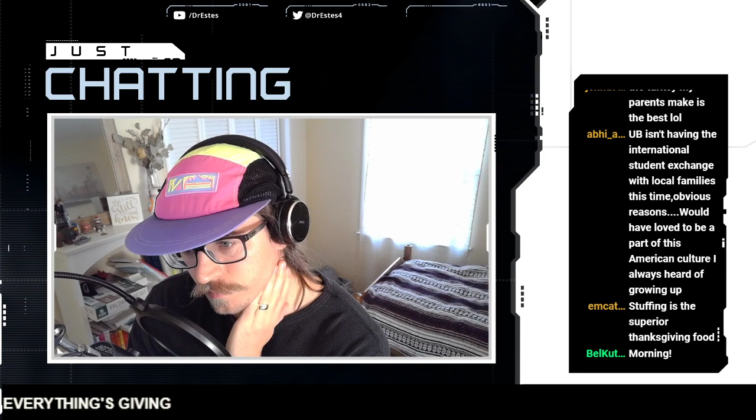Good morning, Belka. Abhinav says UB isn't having international student exchange with local families this time, for obvious reasons. Yeah, that's a huge bummer. Would have loved to be a part of this American culture I always heard of growing up. I heard you, Abhinav, I was actually thinking of that last week, because they do that every Thanksgiving. That's a huge bummer. emcat, I agree with you, stuffing is the superior Thanksgiving food.

How did the project go? So far my team is working on part 5. Bit stuck on it. Okay.

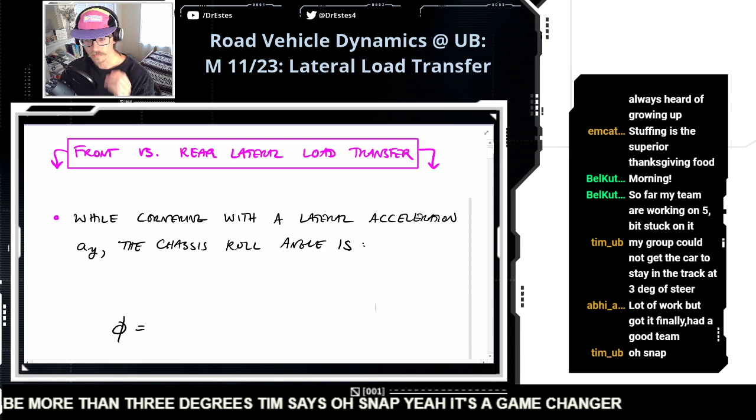Part 5 has been giving us some trouble, says Stonebuster. Okay, gotcha. How about we get through this content today, and then if you guys have questions on the project I'll hang around for a couple minutes and we can talk about it. It'll be fun once you get it to work.

Okay, so we're going to talk about modifying the lateral load transfer during cornering at your front versus your rear tires. So why do we care about that? Depending on the load transfer at the front or the rear, that can make your car more understeer or more oversteer.

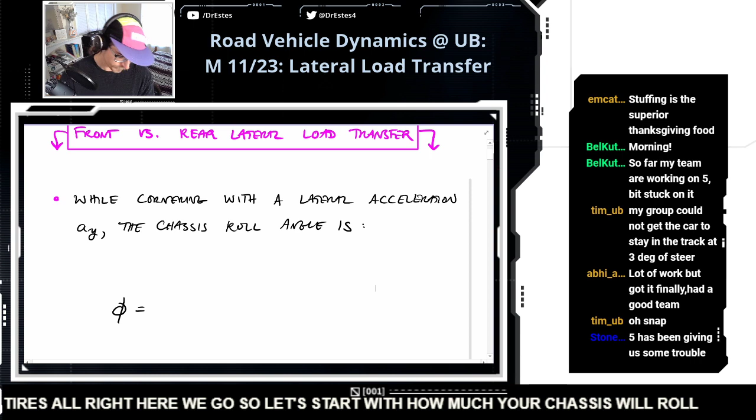Let's start with how much your chassis will roll during cornering. I'm going to put a negative sign out in front of this - I missed this before, I think I forgot the negative sign. So the roll angle is your mass times your lateral acceleration times the height of your CG above the roll center, divided by the sum of your front and rear roll rates.

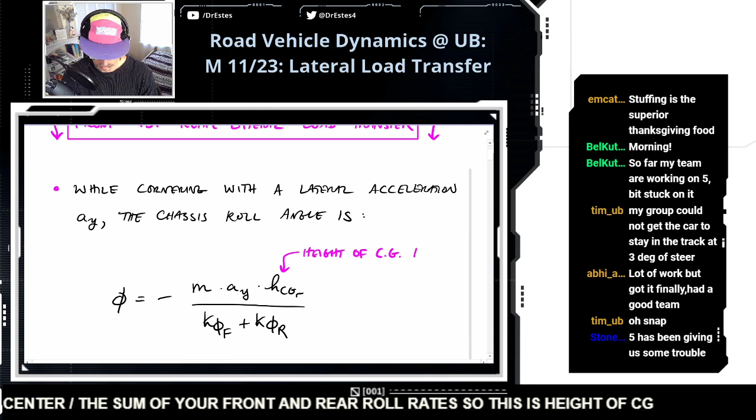So this is height of CG above the roll axis. The roll axis is the straight line that connects the front and rear roll centers. Your CG is somewhere towards the middle of the car, and it'll be some height above that line. And then we have the front roll rate.

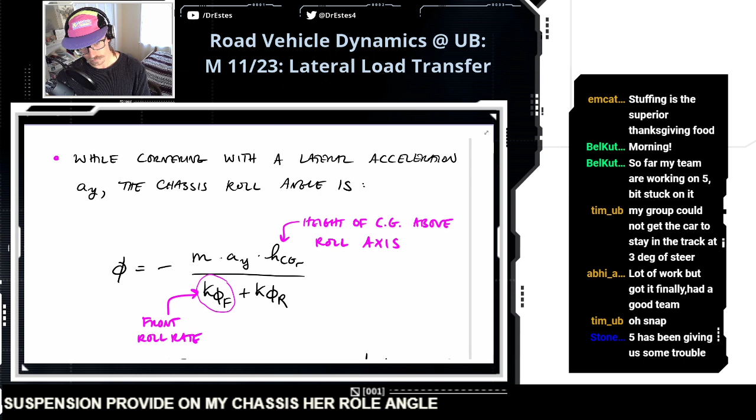The front roll rate is just like a torsion spring - this is saying how much torque does my suspension provide on my chassis per roll angle. It's kind of like Hooke's law: if you roll a little bit, the suspension is going to push back on you with a torque. So the roll rate describes how much torque per roll. And this is your rear roll rate.

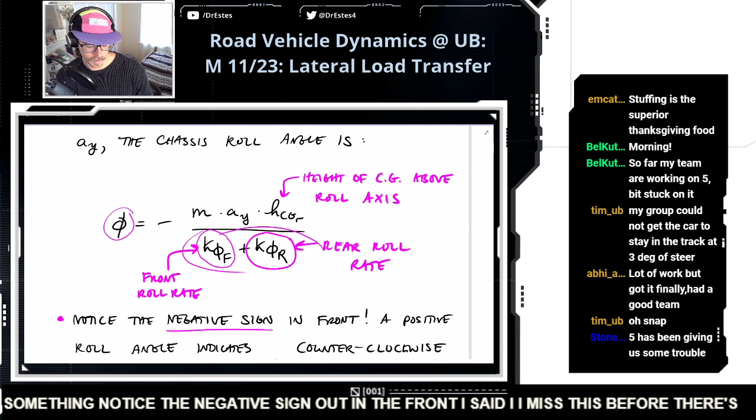So obviously, the bigger these roll rates are, the stiffer your suspension springs, the smaller your roll angle is going to be. Okay, so I want to point out something - notice the negative sign out in the front. I said I missed this before. There's a negative sign because a positive roll angle should indicate counterclockwise rotation about the BX axis.

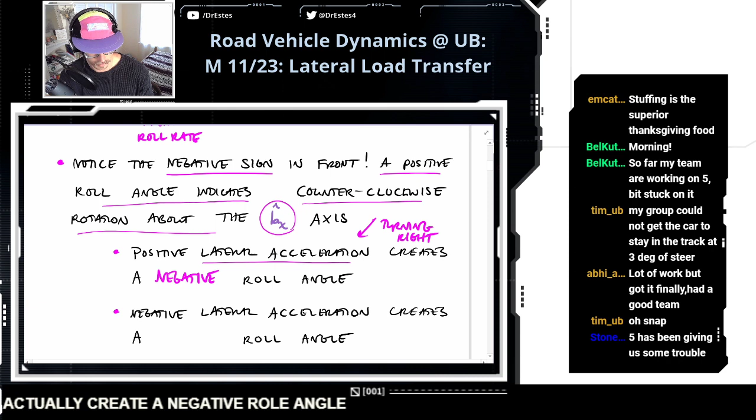That's the axis coming out of the nose of your car, pointing out of your windshield. So by the right-hand rule, a positive roll should be a counterclockwise rotation about that axis. I'll show this with some pictures below, but positive lateral acceleration, which means turning right, that should actually create a negative roll angle. And the opposite of that is if you have negative lateral acceleration and you're turning left, that should create a positive roll angle.

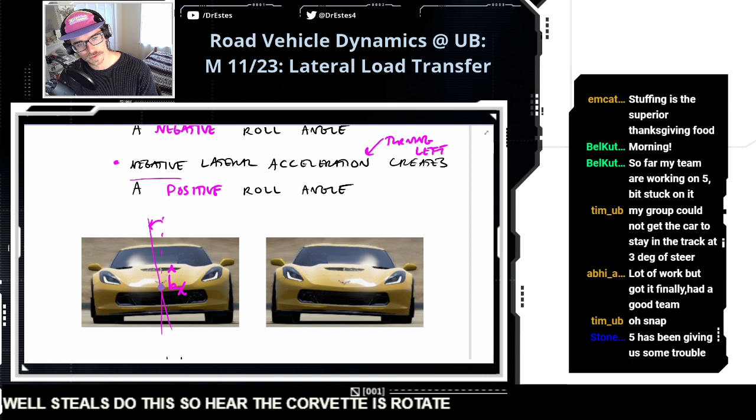So here the Corvette is rotating counterclockwise about that axis, right? So this is a positive roll angle.

Okay, but question for you in the chat. Which direction is this Corvette cornering? Is it to the driver's right or to the driver's left? Is he making a right or a left-hand turn from the perspective of the driver? And the driver is sitting right here.

Okay, good. Right, because the weight's gonna roll towards your outside tires. So we're definitely turning this way to the driver's left, but that means the lateral acceleration is less than 0. So if you're turning left, you have negative lateral acceleration. Whoa, what happened there?

Okay, that's better. That's better.

Okay, so we have counterclockwise rotation about BX. That's positive roll. And then just to be complete here, now we're turning right. That's a negative roll angle because it's clockwise about this body axis. And okay, so now we're turning, our lateral acceleration is to the right, which is greater than 0.

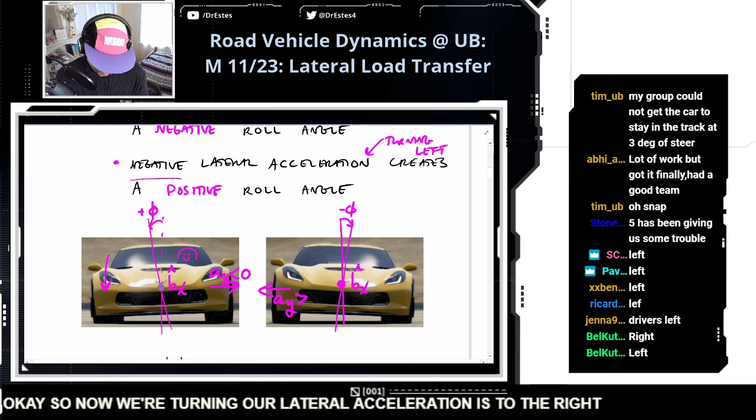Okay. Looked at wrong orientation for a second. It's okay, I forgive you. I mean, I almost didn't forgive you, but now I forgave you.

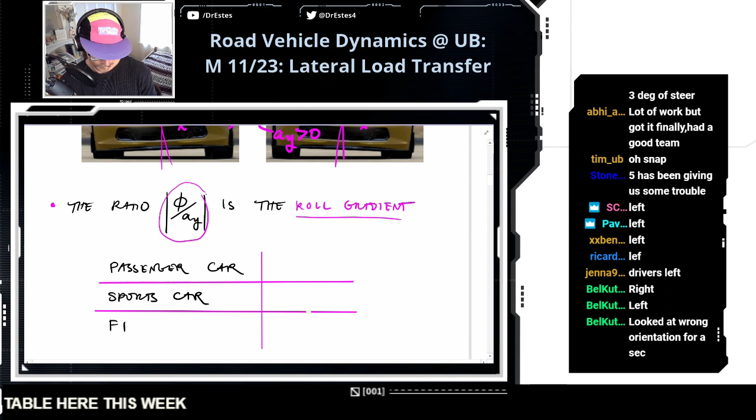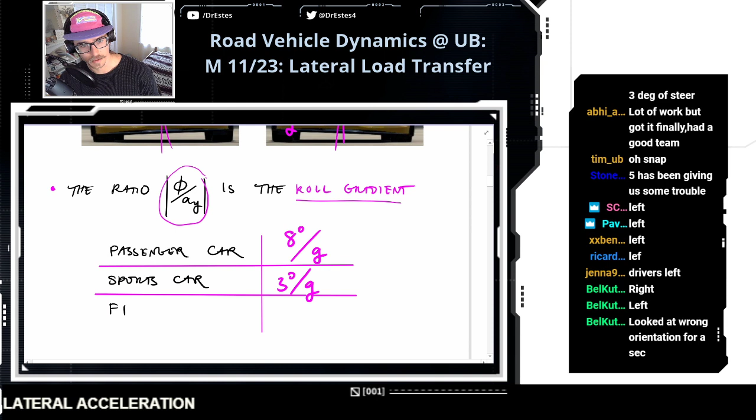Okay, so the amount of roll you get per lateral acceleration in a car is called the roll gradient. And so let's look at this table here, because this will give you an idea. I think we mentioned this last time, but if you're in a passenger car, you're going to get about 8 degrees of body roll per G of lateral acceleration. So you get a decent amount of roll, and that's because the suspension in a passenger car is a little bit softer. That improves the ride of the car. When you go over bumps, you feel it a little bit less, but a softer suspension also allows your car to roll a little bit more. So if we're talking about a sports car, probably like a Corvette or something, maybe 3 degrees of body roll per G of lateral acceleration. And then by the time we get to Formula One, it's going to be like 1 degree.

Is there a symbol for the roll gradient that we use? That's a great question, Benny. I bet there is a symbol, but I don't know what it is. So I've just been using that ratio. If somebody finds some symbol, I would appreciate it. But I haven't found it.

Now, the reason that an F1 car has such little roll has to do with load transfer, but it also has to do with the aerodynamics of the F1 car. They're very particular about how the car is aligned with the pavement, and there's very little space there. So if you get some body roll, you're gonna bottom out. Excuse me.

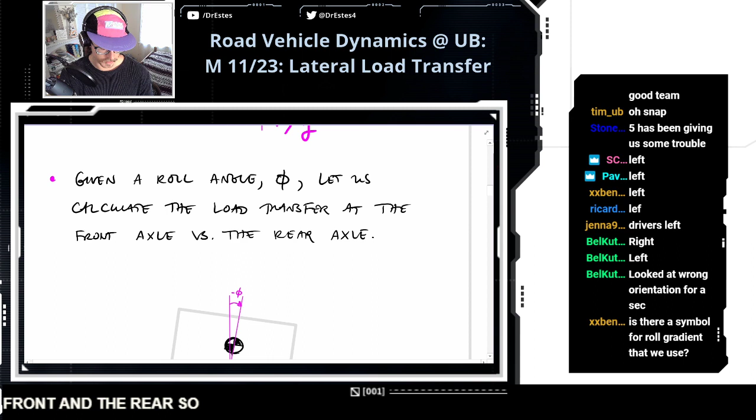Okay, so today we want to talk about what's going to be the relative load transfer at the front and the rear. So let's just say we're given a roll angle to start.

And so what we're going to do here, we have the BX axis pointing out towards us. And okay, so the driver would be like over here on the left side of the car. And so this roll angle, this is a negative roll angle, which means that we have positive lateral acceleration and we are turning to the right.

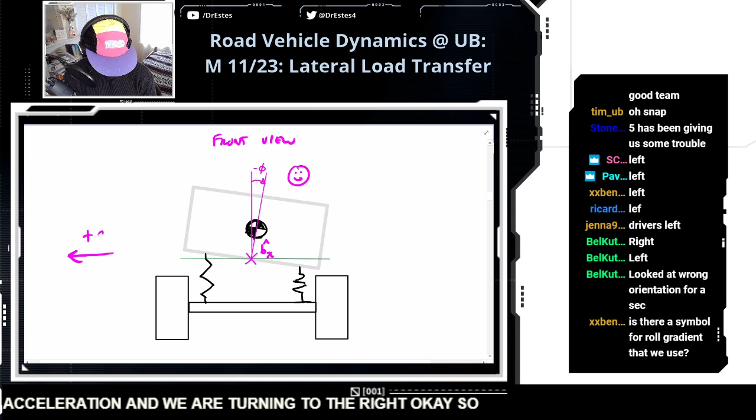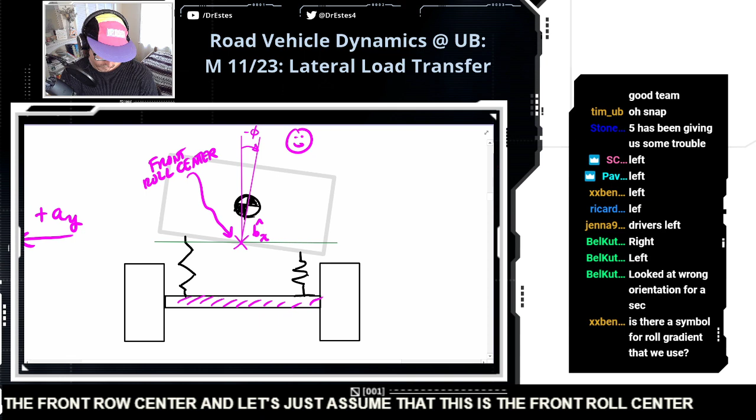Okay, so all right. So what I want to do, I think I have it written down here. We're going to calculate the net moment acting on the front axle. All right. But we're going to take this moment about the front roll center. So it's the moments acting on this axle, but we're taking the moments about the front roll center. And let's just assume that this is the front roll center. Okay, so this is going to be some height above the ground.

The symbol for this is height of the... wait, that's not it, that's not it. We use this: height of the roll center at the front. All right.

So we're going to sum the moments about the front roll center, and there's three main force contributors to the moment on the axle. So first we're going to put in the lateral forces.

So we're turning to the right, so there's a lateral force at the left front tire, and I'll do the same thing at the right front tire. So we have lateral force at the left front tire and lateral force at the right front tire. These are our first contributors to the moment about the roll center, and they act over a moment arm that's the height of the roll center at the front.

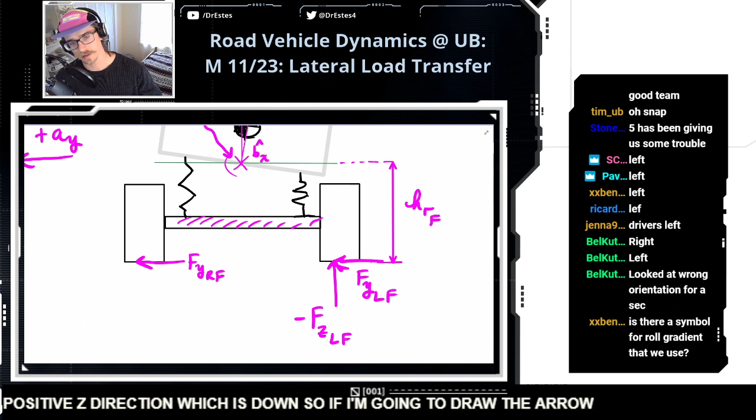Okay, so the next contributors, let's stick with the tire forces. We're going to have the normal loads on the tires. Those are also going to produce a moment on the axle, and we're taking this moment about the front roll center. So I'm going to draw the arrow like this: FZ at the left front. But I have to put a minus sign here because FZ is defined in the positive Z direction, which is down. So if I'm drawing the arrow up, I have to indicate that this is minus FZ at the left front tire. Let's do the same thing over here: minus FZ at the right front tire.

Now the distance—we're going to define these forces acting at the center of each tire, so the distance between these is the track width at the front. Generally the track width at the front and the rear is very close, but it might differ by a couple inches. So if we're looking at the moment that these forces create on the axle about the front roll center, our moment arm for both of these is going to be half the front track width. That's the moment arm for each of those forces.

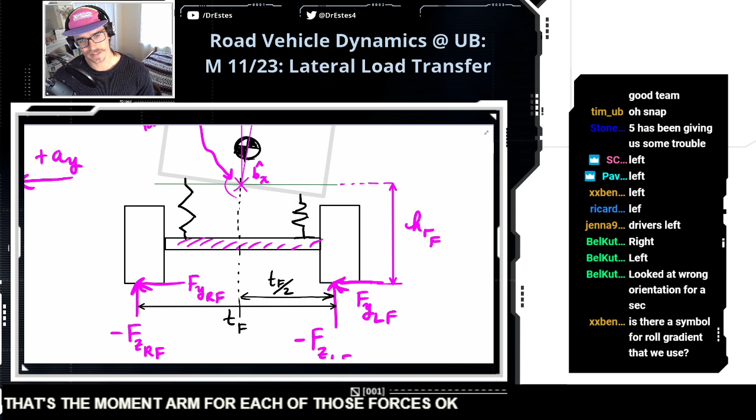So that's the second contributor of moments. We have the lateral force acting over a moment arm, the height of the roll center at the front. We have the normal forces acting over a moment arm, half the track width at the front. Now the last contributor to the moment on the axle is going to come from your suspension springs.

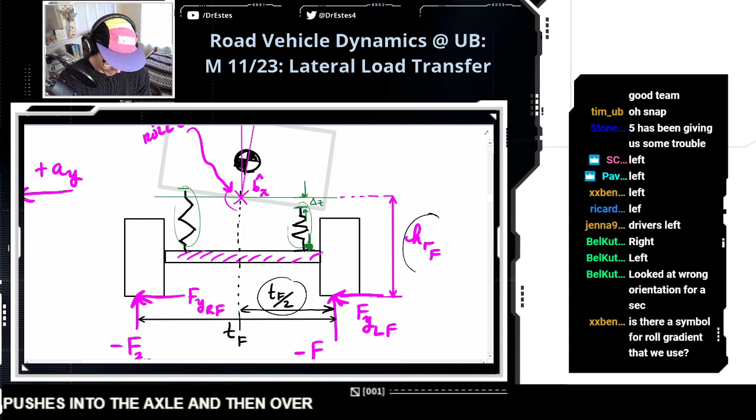So like when the body's rolling, we see that this spring was compressed—maybe we'll call it a distance delta Z. So what is the axle going to feel? It's going to feel that compression, like pushing down here at wherever that spring attachment point is. I'm pushing into the spring, and then the spring pushes into the axle. And over here, this spring is getting stretched by the same distance, assuming it's symmetrical on both sides. So now the chassis is pulling up on this spring, and the axle is going to feel that force pulling up. So it's like pushing down on the left side of the car and pulling up on the right side.

And the way we can describe the moment this creates on the axle—you could either have the forces acting over the distance between the springs at the front, divided by 2 because it's the halfway point. So you could have the spring force acting over half that distance, or we defined the front roll rate, which is the moment produced by the front suspension per degree of roll. So we have an angle in here, minus phi. The way I'm going to include the moment here is I'm actually going to use the front roll rate, so I'll say that the moment is the front roll rate times that angle.

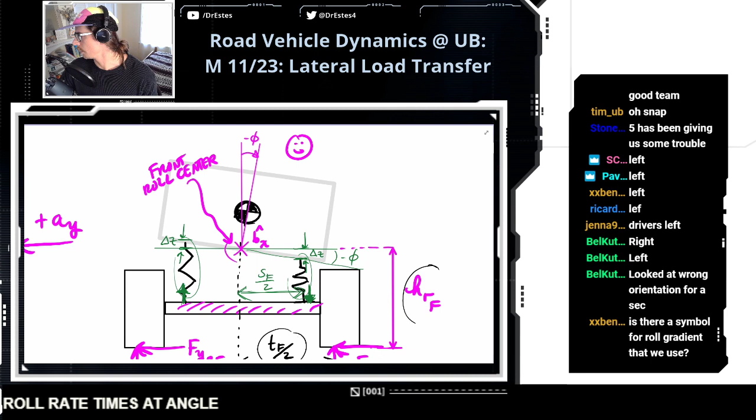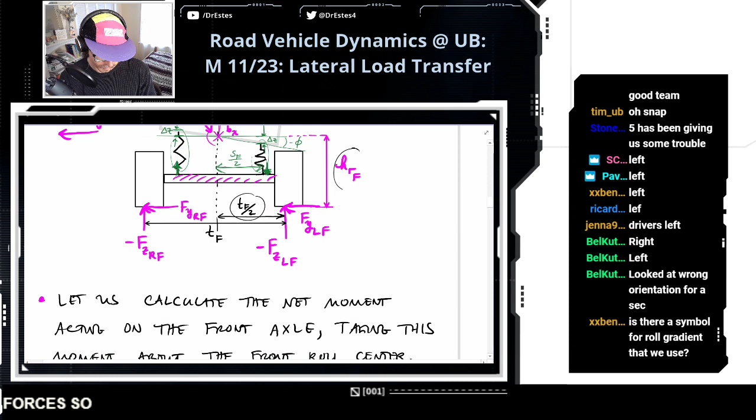Here we go. So we're going to do the moments acting on the axle about the roll center, and we're going to say that these moments are balanced—we're just stuck in a corner with the body rolling a certain amount. First I'm going to have the moment from the lateral forces. You can see that the lateral forces are going this way to the left, and they're going to tend to produce a clockwise moment on the axle about the roll center, so that's a negative moment. So I'm going to have minus lateral force from the right front plus lateral force from the left front, acting over the height of the roll center at the front. That's the lateral tire force moment on the axle.

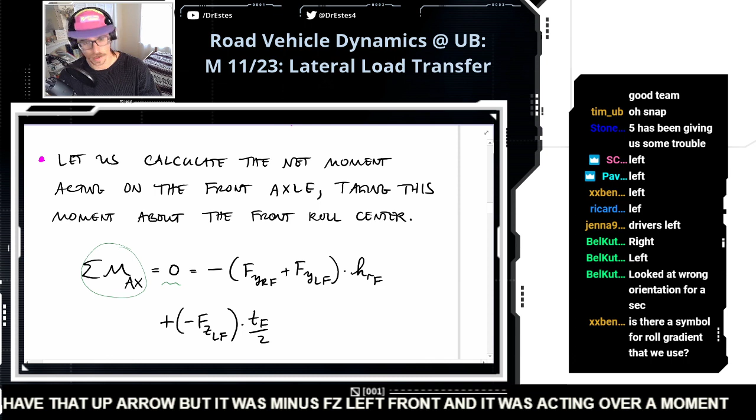Now we're going to move on to the normal force. The left front tire is going to make a positive moment. If you look at the picture, it's going to want to push the axle counterclockwise. So we have that up arrow, but it was minus FZ left front, and it was acting over a moment arm, the track width at the front over 2. Then we need to subtract the moment from the other side of the car, because that other tire is going to produce a moment in the opposite direction. So this is the right front tire normal load, but it acts over the same distance.

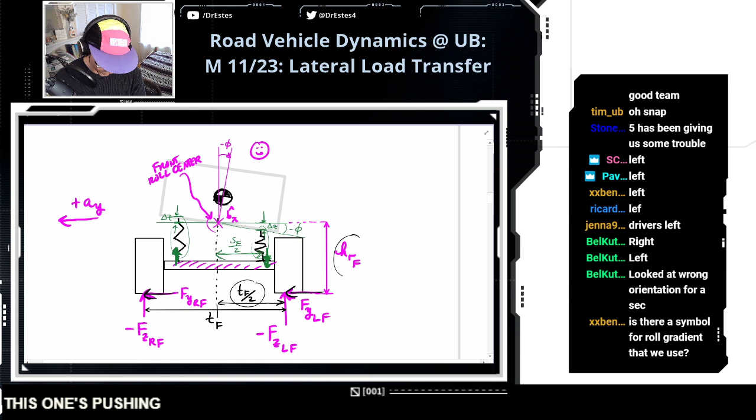Okay, finally we're going to have the moment from the suspension springs themselves, created by the suspension springs on the front axle. You can see this one's pushing down, this one's pushing up. That wants to create a moment on the front axle this way, which is clockwise, so that's a negative moment on the front axle.

So the way we're going to account for this, like I said, we're going to use the roll rate at the front. So minus the roll rate times the roll angle, which is minus phi. And so we have the moments from all three contributions here.

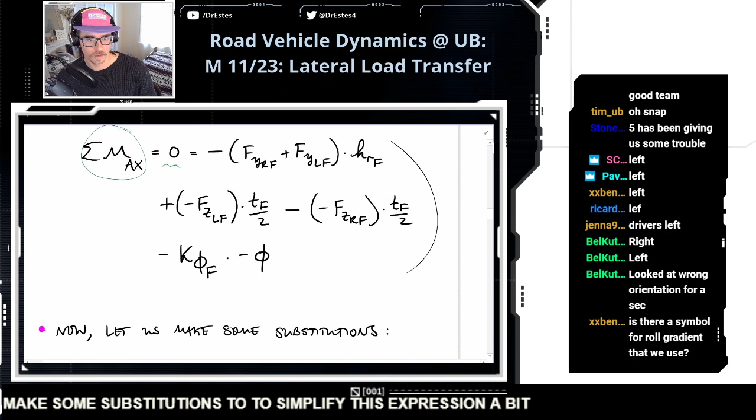Here we're going to make some substitutions to simplify this expression a bit. I'm going to do this in each part in sequence. So we're going to start with the front lateral force, that first moment we looked at. We know that the sum of the lateral forces from the right front and left front tires, we just call this the total lateral force at the front tires, FYF. Now I'm going to bring in the yaw moment balance.

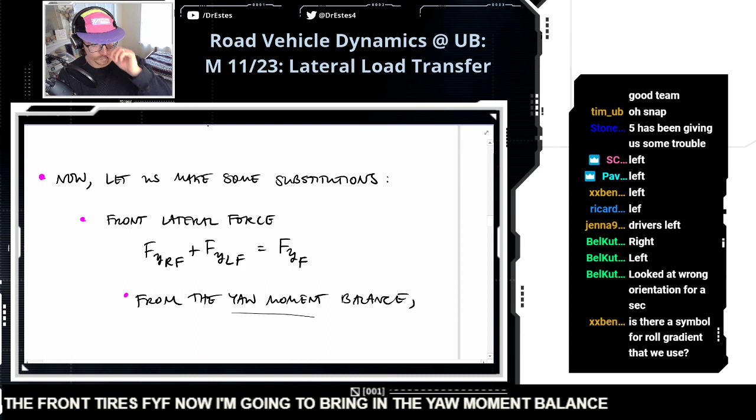You'll see why I'm doing this. If the moment about the z-axis of the car is balanced from the front and the rear, like we're not spinning out, then the moment from the front about the CG should be equal to the moment from the rear. Those two moments should be balanced in yaw if we're not spinning out. So what I'm going to do, this means I could write the rear lateral tire force in terms of the front.

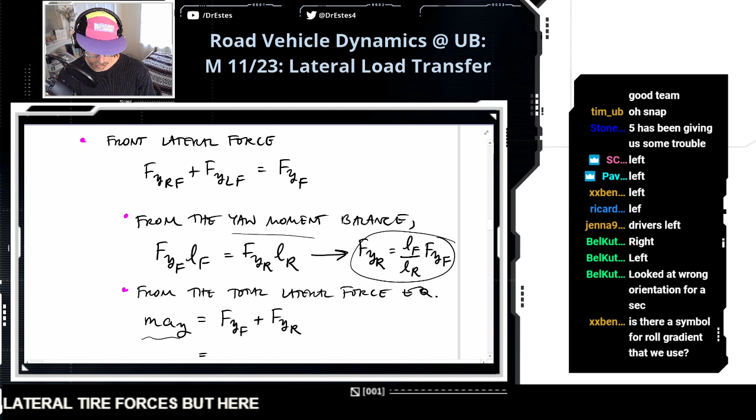Now if we look at the total lateral force equation, we know that the mass of the car times its lateral acceleration should be, if we're just looking at small angles here, the sum of the front and rear lateral tire forces. But here, I can write the rear tire force in terms of the front. So this is FYF plus LF over LR times FYF. I'm just making that substitution, and this is why I'm doing this.

This is pretty cool. Using this equation, I can write the front lateral force in terms of LR over L times mass times lateral acceleration. If you're wondering where this L comes from, if you look at this right-hand side, I could write this as LR over LR times FYF plus LF over LR times FYF. So this becomes LR plus LF over LR times FYF, and the sum of these distances is just the wheelbase, L. Then I divide by this term to get FYF by itself.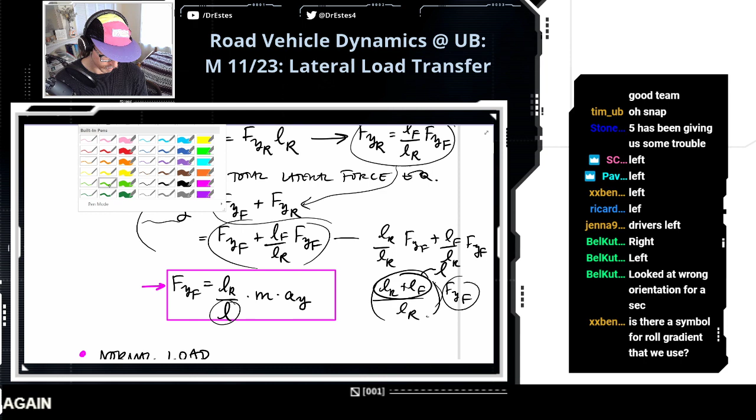So, question for you again. What is this term, LR over L? We have another name for this. There we go, Chen. This is the front weight ratio. So your front lateral tire force is your front weight ratio times the mass times the acceleration. That kind of makes sense.

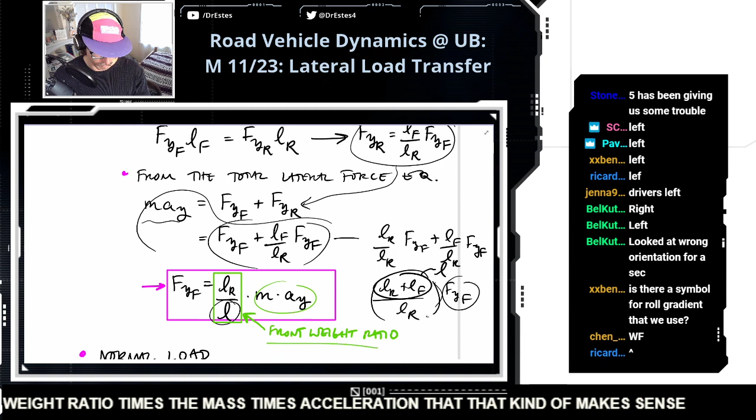So let's keep going here. We're going to substitute this up into our moment balance above. Now when we get through this in a couple minutes, the goal is we're solving for the load transfer at the front. So that's our end goal here. Moving on to the normal load, we're going to make this substitution into the expression.

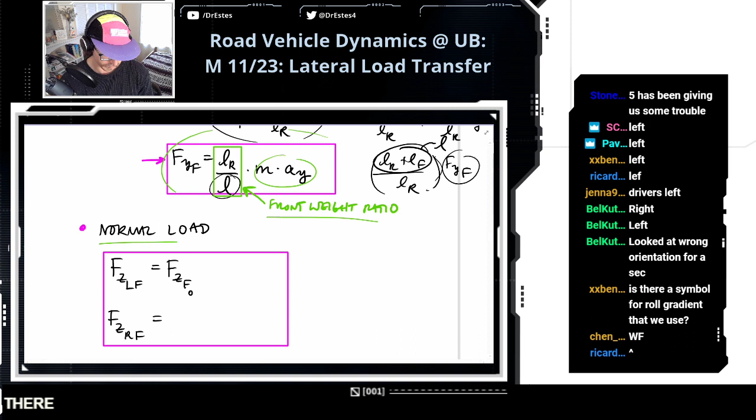So the normal load at the left front tire, you could write it like this. FZ front naught - I know I have subscripts on subscripts right there - but what this is, is the static load for each front tire. So if the car's just sitting on the pavement, not cornering or anything, the normal load on the right front and left front tires would just be equal to the static load at the front.

And you can calculate that static load from the front weight distribution. But we're going to define this: during cornering, we have load transfer, delta FZ at the front. So I'm just going to define it this way. We're going to say the left front normal load is the static load plus this delta, and the right front normal load is the static load minus this delta.

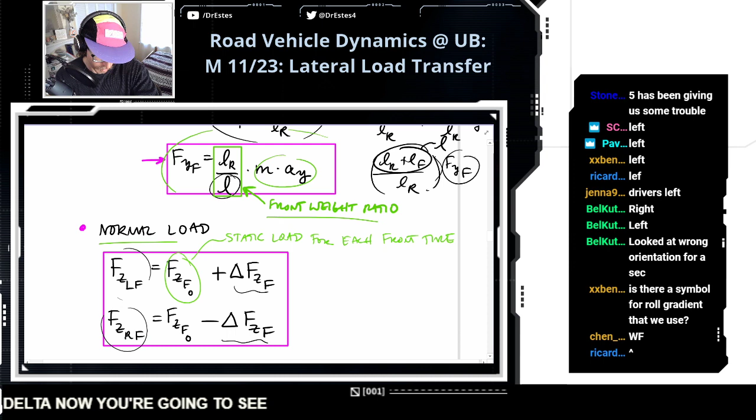Now you're going to see when we get there, we'll be solving for this expression at the end, the amount of normal load. You'll see that depending on the direction you corner, if you're turning right, you'll have positive AY, if you're turning left, you'll have negative AY. The sign of this term is going to automatically adjust depending on the direction of cornering - it'll either subtract load or add load. So that'll be cool. So we have that normal load.

Now let's talk about the suspension moment. So the moment from the suspension was minus the front roll rate times that roll angle. And we have an expression for that roll angle, which we had at the top of these notes here. So I'm going to substitute that in: the minus roll angle is the mass times the lateral acceleration times the height of the CG above the roll axis, divided by the total roll rate.

I'll put a box around this too.

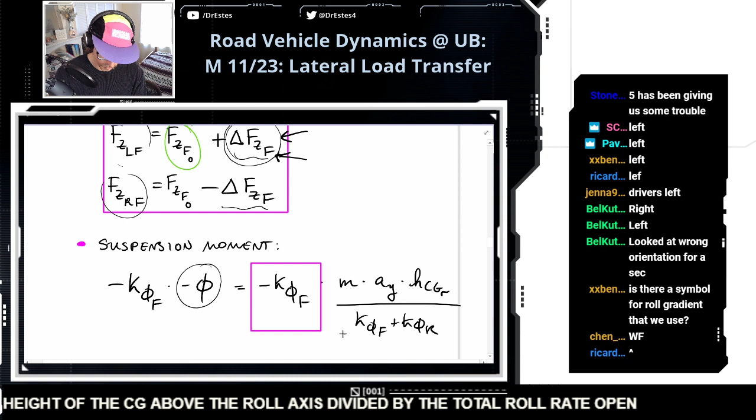Okay, so now we made a couple expressions to substitute into our moment balance. So I'm going to do that right now, and then we'll be able to simplify this expression even further. It's a really cool expression that you get a lot of insight out of.

Okay, so here is the moment from the lateral force. It's that front weight distribution times the height of the roll axis at the front, times mass times lateral acceleration.

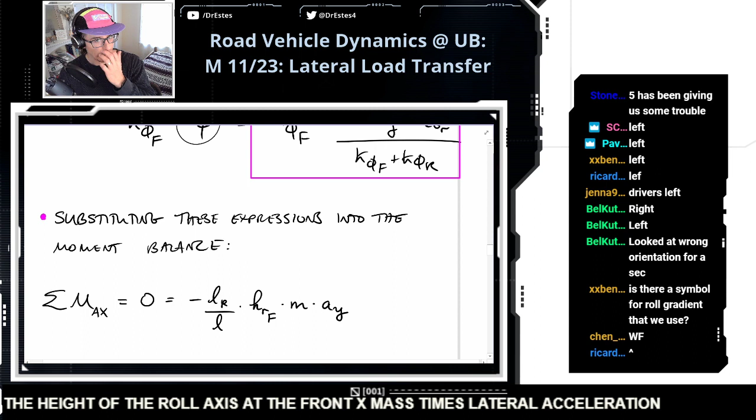And then the moment from the normal loads, we're going to make this substitution. We have the track width over 2 times that static normal load minus this load transfer. And then the other tire produced a moment in the other direction, and this one was, we added that load transfer.

And we can pause here and notice something cool. This term and this term are going to cancel, so I'm gonna swipe that out.

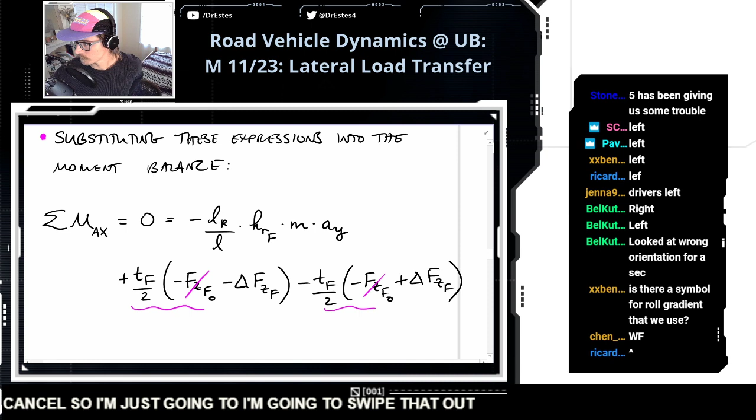Okay, and then we have the moment from the suspension. So I have minus K phi F over K phi F plus K phi R, times mass times lateral acceleration, times the height of the CG above the roll axis.

Okay, so we're gonna gather some terms here, because you can see that this moment has mass times acceleration, and this one also has mass times acceleration. So we can gather some terms, so we're gonna get

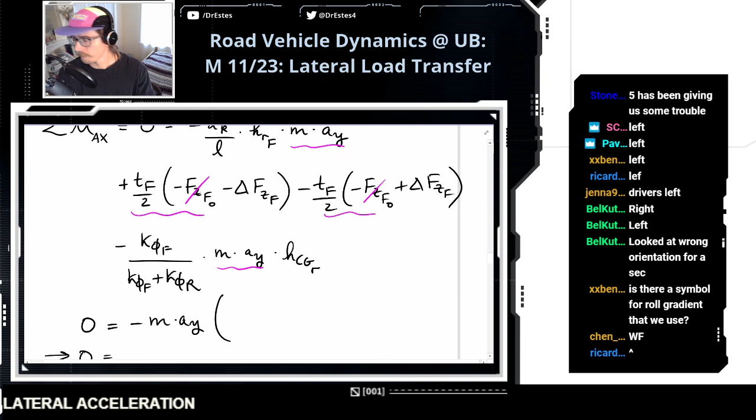0, because all of this sums up to 0, is minus mass times lateral acceleration times my front weight distribution, LR over L, times the height of the roll center at the front, plus K phi F over K phi F plus K phi R, times the height of the CG above the roll axis.

And then from this normal load stuff, the only thing that's left over, because a lot of this canceled out, is I have the track width at the front times this load transfer.

Oh, wait, that's what I was going to use this 0 equals for. Good gravy, let's just move this down. That's what the 0 equals was for.

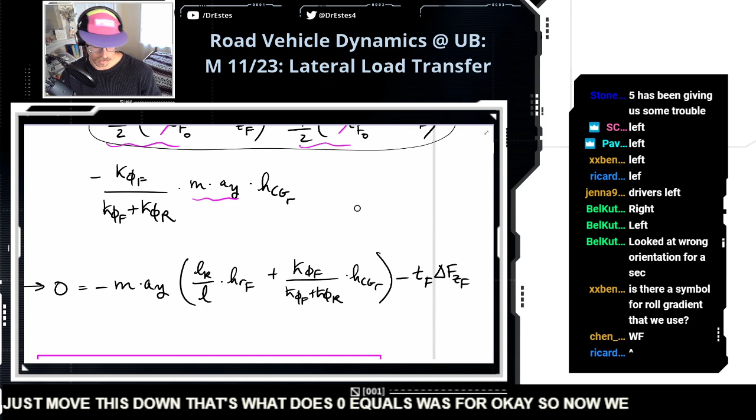Okay, so now we can solve for this term. That's the golden goose, that's what we were looking for: the load transfer at the front.

So it's going to be minus mass times lateral acceleration divided by the track width at the front, times LR over L times the height of the roll center at the front, plus K phi F over K phi F plus K phi R, times the height of the CG above the roll axis.

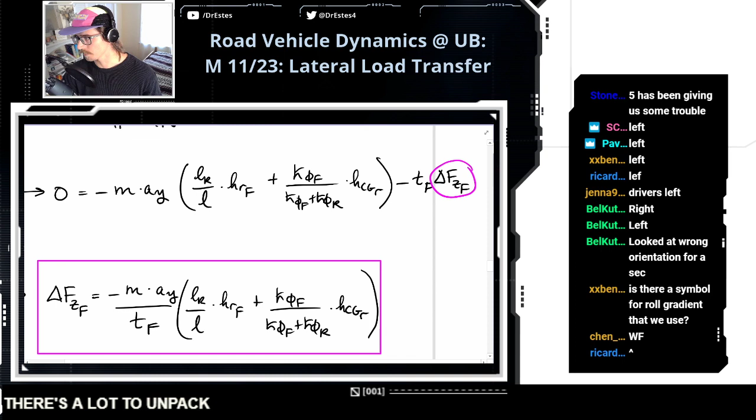There's a lot to unpack here. Or there's 4 key things.

Okay, something we pointed out earlier: LR over L, the front weight ratio. This ratio is called the front roll stiffness distribution. And that makes sense - it's kind of like the front weight distribution, because here's the total roll rate, and this is the front divided by that total. So it's like the portion of the roll stiffness allocated to the front suspension. K phi F over K phi F plus K phi R is the front roll stiffness distribution.

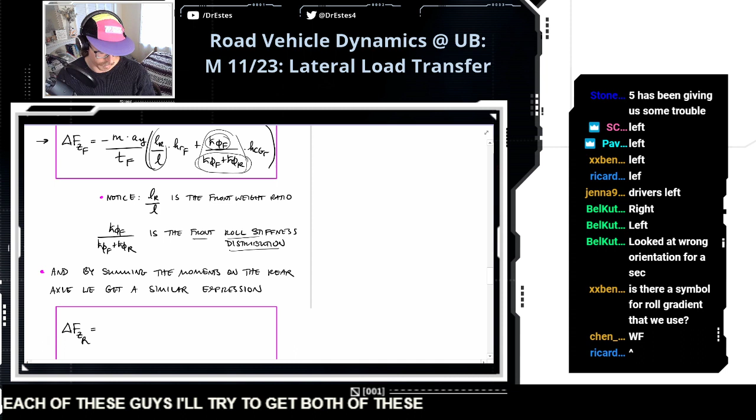Now, if you go through this whole process at the rear axle, you get a very similar expression. So let's just fill that out before we start talking about each of these. I'll try to get both of these on the same screen here. So it's going to be the same, minus mass times lateral acceleration.

But now you're going to have the rear track width, which is often very similar to the front. And then you're going to have LF over L here, which is the rear weight distribution. And then you have the height of the roll center at the rear axle. Maybe I'll just zoom in here.

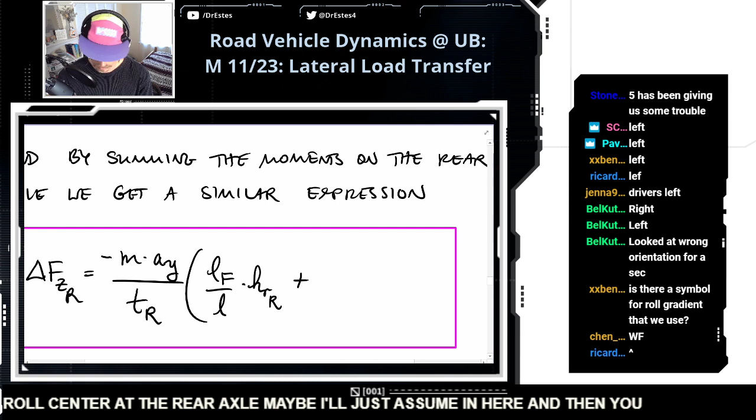And then you have plus the rear roll stiffness distribution, K phi R over K phi F plus K phi R. And this term is the same: the height of the CG above the roll axis.

First thing to check here. Let's look at this one, the front again. If I'm turning right, this term will be positive, and then overall this will be a negative number. So keep that in mind: we're turning right, and I'm going to get a negative number for this.

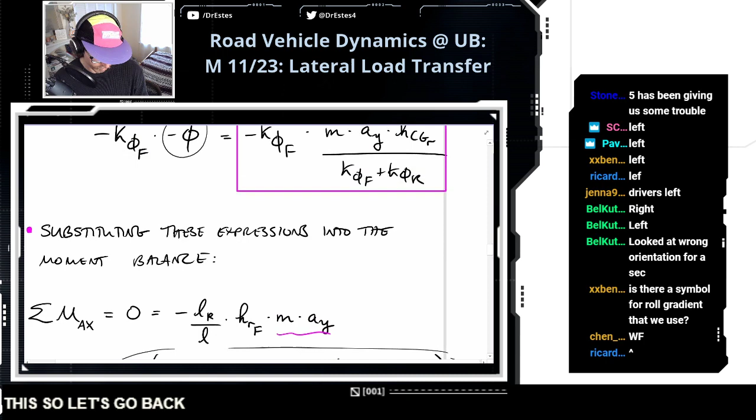Let's go back here, because I want to make sure this works. If we're turning right, that means my left tires are my outside tires. The static normal load is going to be a negative number, and then we're going to get a negative number for this, so that's going to make it more negative. So we're gaining load here.

Conversely, if we're turning left, then we'll have negative lateral acceleration, but overall delta FZF will be positive, and so we'll lose load here. I just want to point out that these formulas automatically account for the direction of cornering, which is nice as well.

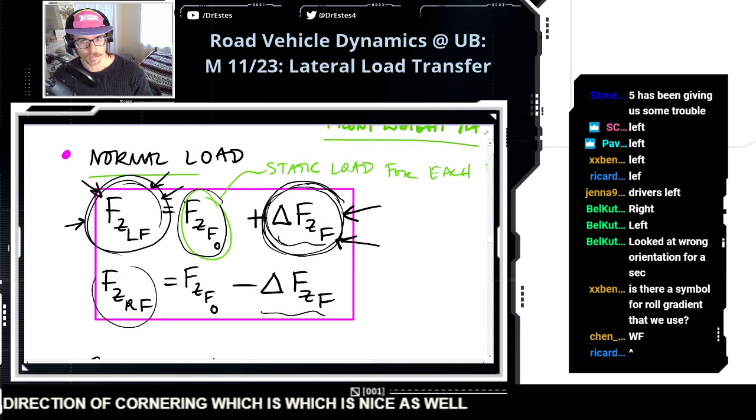Now we're going to point out the four main features of these equations, which give us a ton of insight. Let's look at this first: if I reduce the track width at the front axle, meaning if I move the front tires closer together, that is going to increase the load transfer at that axle. On the other hand, if I spread the front tires out, that's going to reduce the load transfer at that axle. So that's the first observation.

How about we write this down. Increasing the track width at an axle, front or rear, reduces the load transfer at that axle. So that's our first observation.

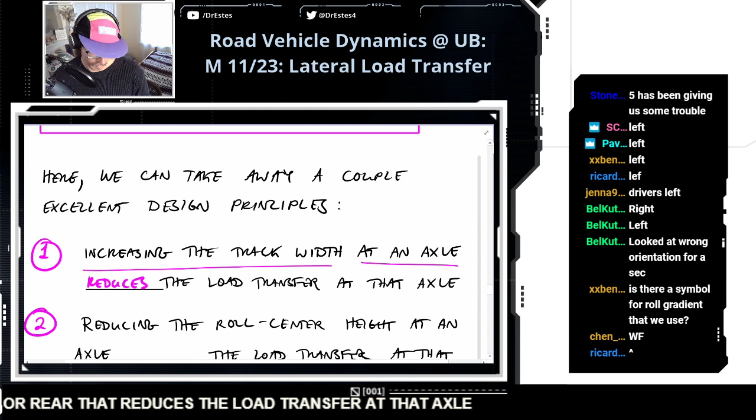Let's make another observation. Let's look at the roll center height at an axle. If I reduce the roll center height at an axle, that'll reduce the load transfer at that axle. You put the roll center closer to the ground at the front, you get less load transfer at the front. It's not magic. So reducing the roll center height at an axle, front or rear, reduces the load transfer at that axle.

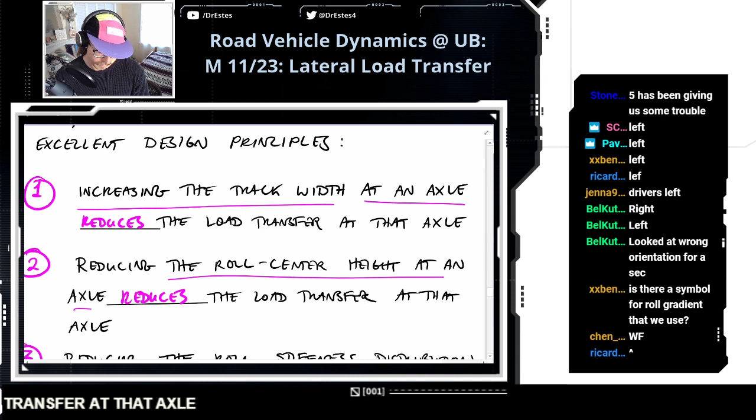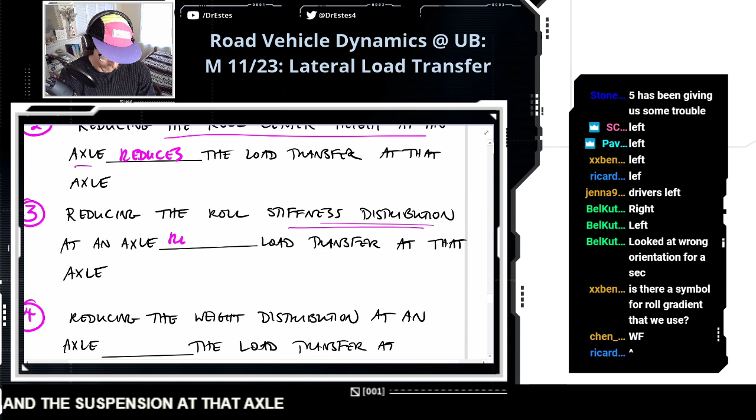What's the next one? Reducing the roll stiffness distribution. So here we have the front roll stiffness distribution - it's the proportion of stiffness at your front suspension versus the total roll stiffness. If I reduce the stiffness of the front suspension, I actually reduce the load transfer at the front. That one's a little trickier, but we'll talk - we have an example about that a little bit later. So if you reduce the roll stiffness distribution at an axle, meaning you soften the suspension at that axle, you reduce the relative load transfer at that axle.

And then, fourth observation: this is the front weight distribution. If I reduce the front weight distribution, that's going to reduce the load transfer at the front. So basically, the closer your CG is to a given axle, the more load transfer that's going to happen at that axle. If your CG is closer to your front tires, you're going to get more load transfer up at the front. So reducing the weight distribution at an axle reduces the load transfer at that axle.

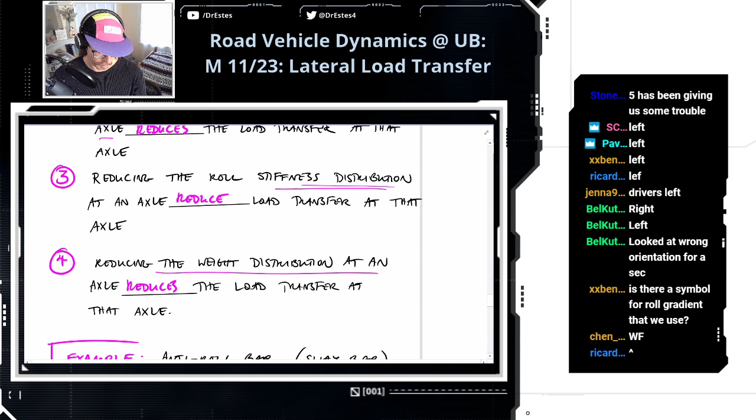Okay, so I want to point out one conceptual thing here, and it comes back to tires. We're talking about increasing or reducing the relative load transfer at an axle. What would motivate me to change the load transfer at an axle? Okay, we'll squeeze this in here.

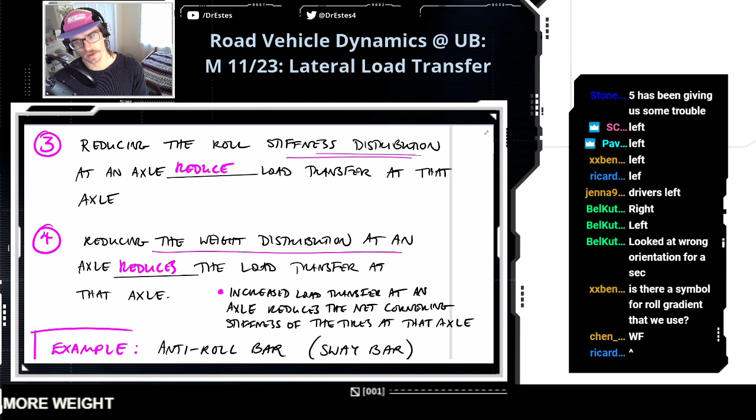Increased load transfer at an axle reduces the net cornering stiffness of the tires at that axle. We did an example to illustrate this with a Formula SAE car. When load is transferring, you put more weight on one tire, and that increases the cornering stiffness, or the grip, at that outside tire, but the inside tire loses load and it loses grip. So even though one tire's gaining grip and one tire's losing grip, the net effect is that it actually loses more grip than when it was just statically loaded.

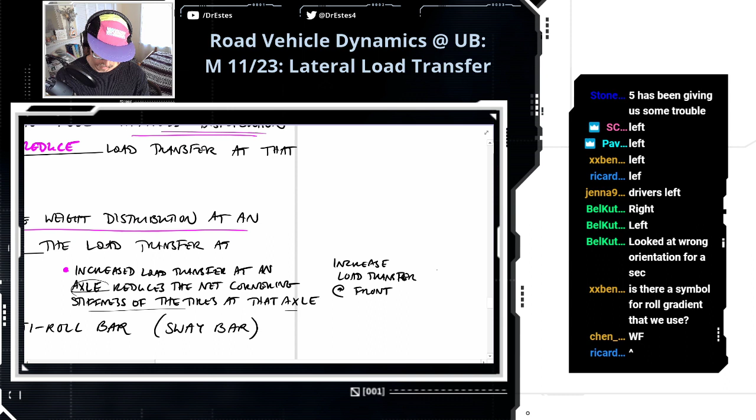Okay, so we increase the load transfer at an axle, we reduce the net cornering stiffness at that axle. So if we increase load transfer at the front, the front cornering stiffness is going to go down a little bit relative to the rear. The other side of that coin: increase load transfer at the rear - by that argument regarding the tires, the rear cornering stiffness is going to go down a little bit relative to the front.

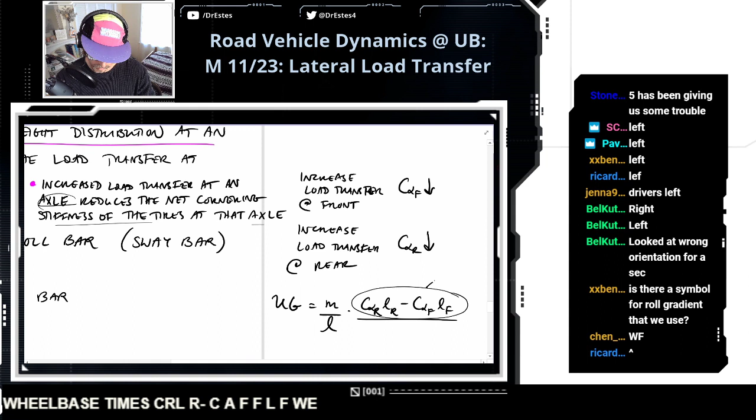Okay, so the next piece, how this connects to vehicle handling, is the understeer gradient of the car is the mass divided by the wheelbase times C alpha R times L R minus C alpha F times L F, which is the derivative of yaw moment with respect to beta. It's called the directional stability derivative - dang, I keep forgetting what it's called. But this is the key term here. And then obviously this is divided by the product of the cornering stiffnesses. Because if the understeer gradient is less than 0, we call our car oversteer. If it's greater than 0, we're understeer, and so on.

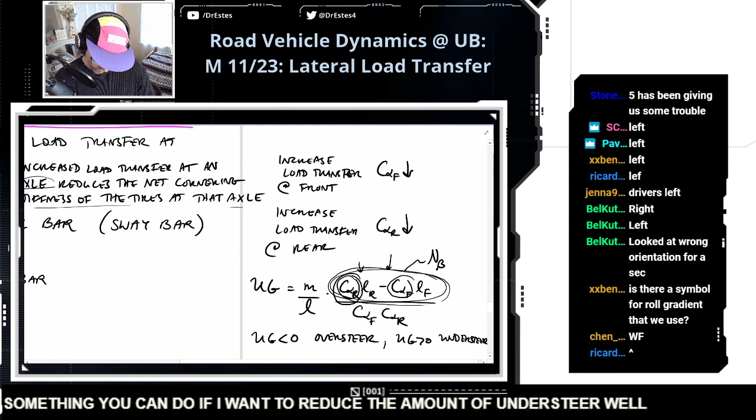By tweaking the values of the cornering stiffness, you're playing with the understeer gradient of your car. So let's say you're like, man, my car is too understeer, I have to put too much steering into this corner, I'd like to reduce the amount of understeer. Something you can do is make your rear cornering stiffness smaller. If I make this term smaller, I'm subtracting, and my understeer gradient gets smaller, so I move more towards oversteer.

So let's do a practical example here. I know we have just a couple minutes left. You guys have probably heard of an anti-roll bar, sometimes called a sway bar.

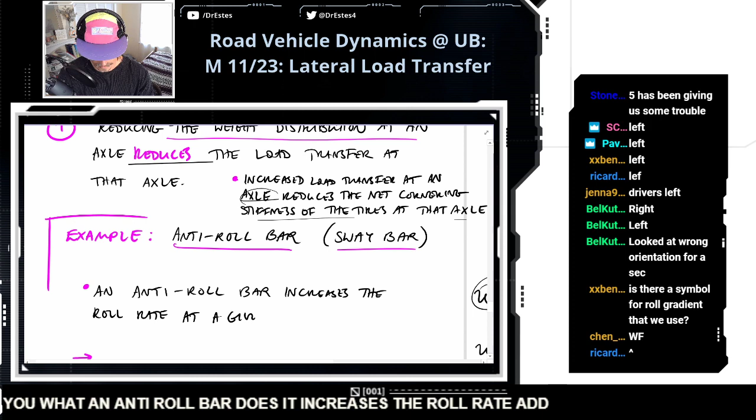So let me tell you what an anti-roll bar does. It increases the roll rate at a given axle. So it'll either increase K phi F, the roll rate at the front, or you could increase the roll rate at the rear. You could make your rear more stiff.

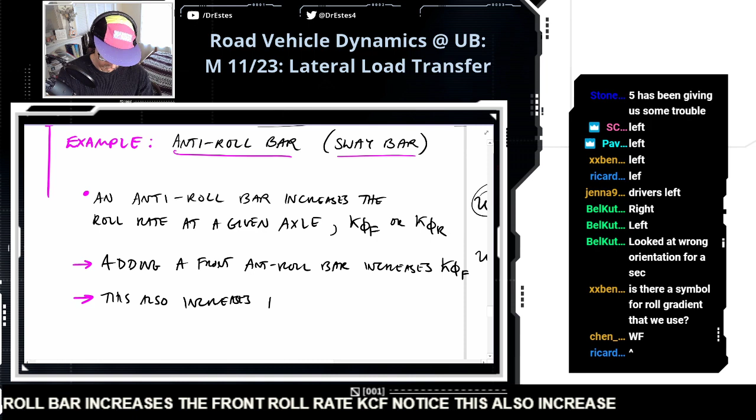If you add a front anti-roll bar, adding a front anti-roll bar increases the front roll rate, K phi F. Notice this also increases the front roll stiffness distribution. That just means a greater portion of your overall roll stiffness of the car is now at the front axle. So I'm saying this ratio goes up — the ratio of the front roll rate to the total roll rate.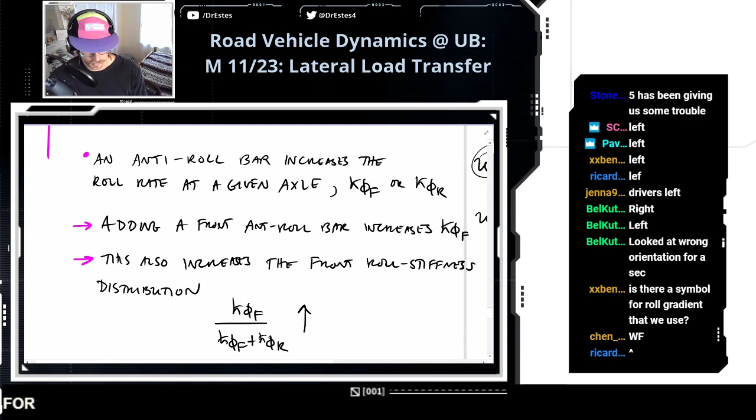Now, if we go back to our expression for the load transfer at the front, if you pump up this number here, you're going to get more load transfer at the front. Okay, so the anti-roll bar, this is what it looks like.

You can have it at the front or the rear. At the rear, it acts like a torsion spring that adds additional torsional stiffness, which just means resistance to roll at a given axle. I kind of colored it in pink here, so it's separate from your main suspension coils. It's an additional thing that actually reaches from one side of the car to the other.

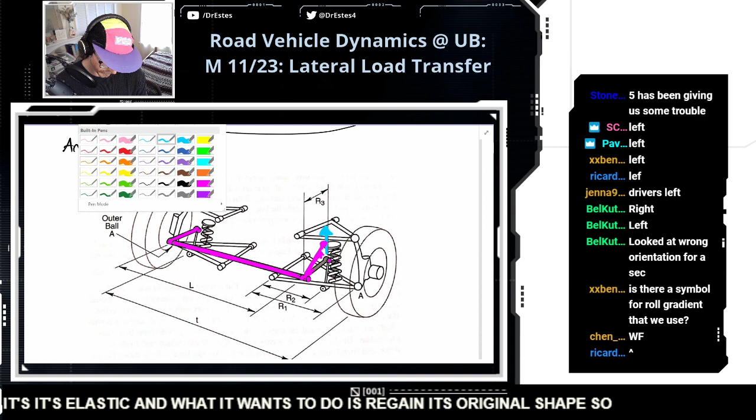Imagine this: let's say the car is rolling and it's pushing this side of the bar up. Imagine this arm rotating up a little bit. If I deform this, I rotate it up. Okay, so now it's got bent. This thing is going to resist being bent. It's elastic, and what it wants to do is regain its original shape. So to regain its original shape, it's going to produce a torsional moment in the reverse direction that's going to try to push it back down.

Basically, the same thing would happen over here. Anytime one of these lever arms is pushed up or down by body roll, this bar is going to want to create a moment that counteracts that rolling motion.

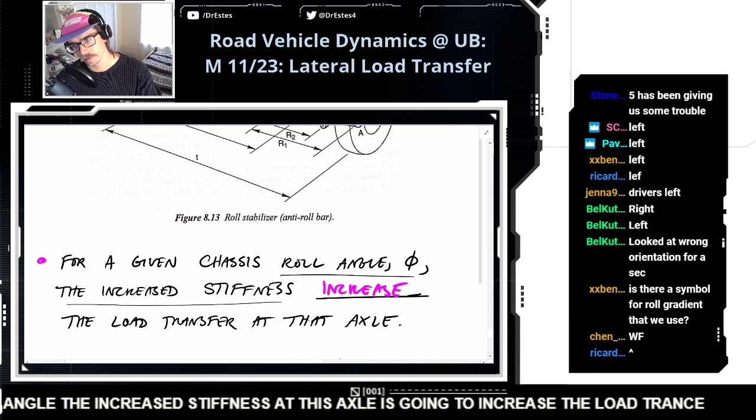So for a given chassis roll angle, the increased stiffness at this axle is going to increase the load transfer at that axle. Remember, one of our assumptions here is when we get some body roll, that chassis body roll is consistent from front to rear. If the front rolls a certain angle phi, the rear is also going to roll that same angle phi.

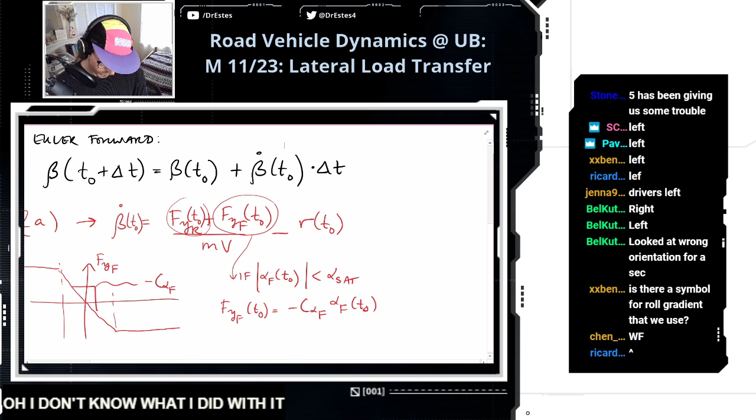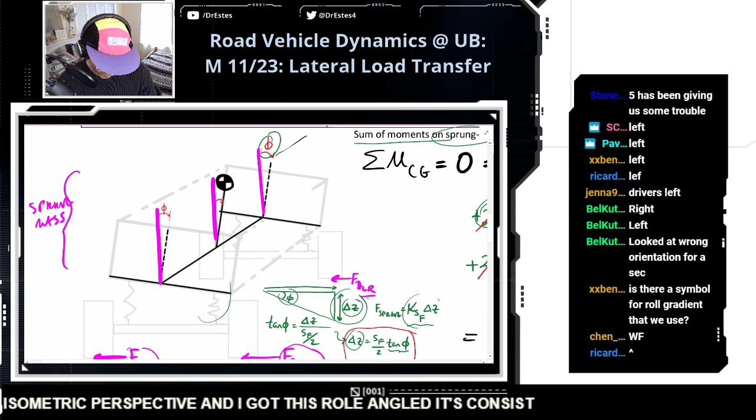So that means the roll angle at the front and rear is the same. If the front has greater roll stiffness, for that same roll angle, that's going to produce a greater moment on the axle. It's like I could think of the anti-roll bar as not beefing up these springs, but having the same effect in terms of roll. So if I take a really stiff spring and compress it this same amount, that's going to put more force on the axle than if I compress a really weak spring that same amount. So that's the way I think of an anti-roll bar.

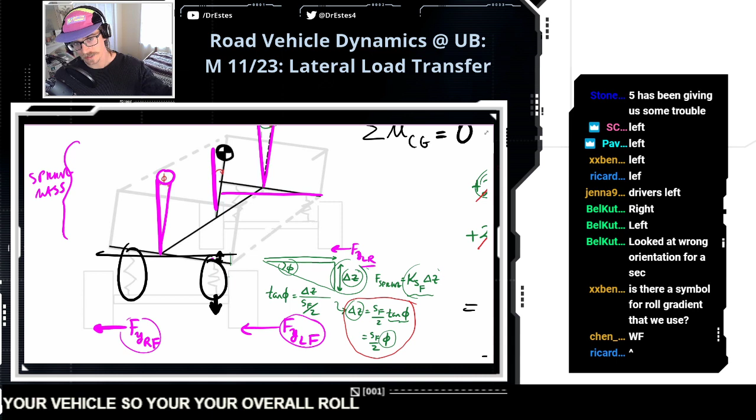I'm going to get this angle of roll. An anti-roll bar adds overall stiffness in roll to your vehicle, so your overall roll angle will be less, but still in proportion to the axle that doesn't have an anti-roll bar, you're going to get more load transfer at that axle. Okay, so I've got to go back here.

So the increased stiffness increases the load transfer at the axle where you have an anti-roll bar. So adding a front anti-roll bar increases load transfer at the front axle, which decreases the front cornering stiffness, because if I increase the load transfer, I decrease the front cornering stiffness, and that's going to make the car more...

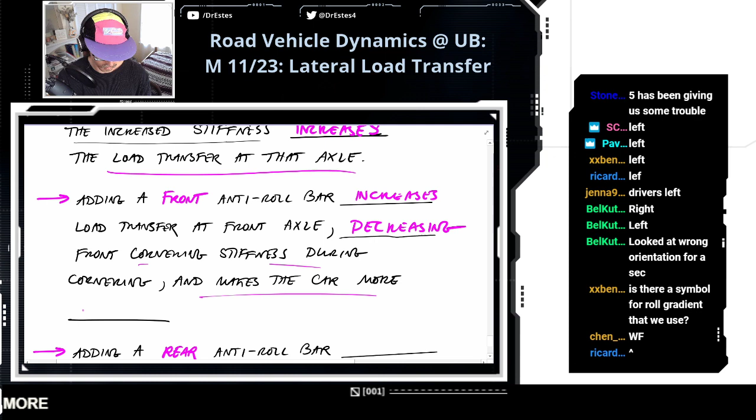What is it going to do? Here's our roll understeer gradient. If I make this number smaller, I make my car more understeer because I'm subtracting less.

Adding a rear anti-roll bar increases load transfer at the rear axle, reducing its cornering stiffness during cornering, and it makes the car more oversteer.

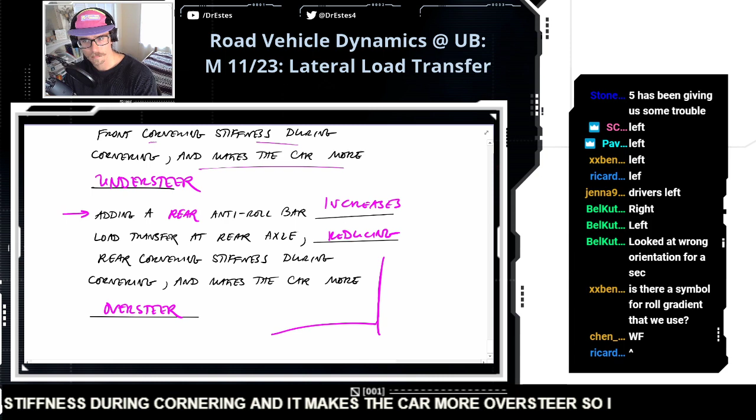So often I'll see anti-roll bars on trucks at the rear. Like I was taking a walk this morning. Yeah, let's look here. Yeah, this is the rear of the truck, right? So yeah, it looks like this, it links across both sides. This one looks really beefy.

But if you see an anti-roll bar at the rear on a truck, that reduces cornering stiffness at the rear, and you know that the designers added this to make the car more oversteer, because on its own, it has too much understeer.

So yeah, adding that, I don't understand why it's a solid axle. Yeah, I don't know.

Yeah, so if you want to make your car more oversteer... why do they call it anti-roll or sway bar? There's no difference, right?

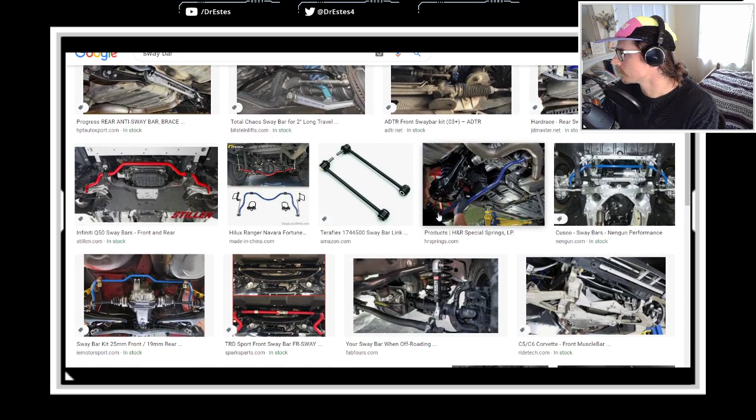Would a sway bar for a camper act in the same way, or does it act in a different manner since it's right by the hitch and not by an axle? I'm just curious. I'm trying to visualize this sway bar for camper towing.

Are you talking about, oh, like this kind of thing? Oh, just different jargon for the same thing? Gotcha.

Oh, this is interesting. Okay, so if your hitch rolls...

Those are load levelers. Well, I think for this, when you're looking at this, the arm is a spring, effectively. Because if the camper were to roll and pull on this chain, it's going to pull on this arm, and then this arm is going to want to go back to its original position, so it'll pull down.

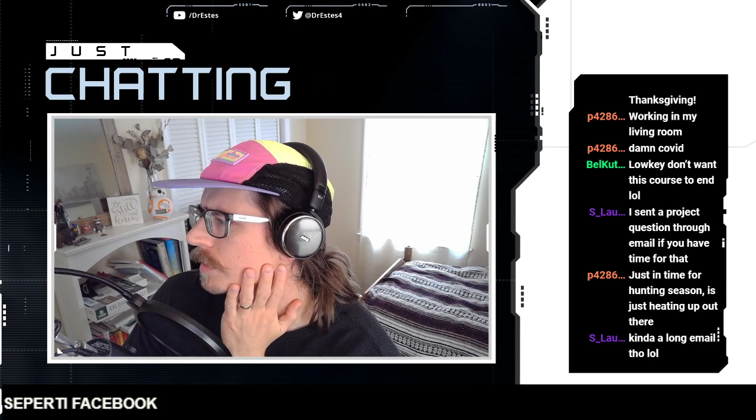The slope of my steady state steering angle is coming out too high. Okay, and you verified they came out the same with different methods? Understood, graded differently.

Oh, you know what? What it might be is the load. Are you considering the FZ to be the load on both front tires? Because I think that's what it needs to be consistent with my results. Like the cornering stiffness equation I give, where it has FZ in there, the FZ is the load on both tires. I wonder if, did you do that? Oh, you think that's what you did? Okay.

Steering wheel. Dang, I'm not sure. Oh wait, cornering stiffness.

Basically you have, like r dot equals something, and you can also make another equation like beta dot equals something. So these are your bicycle model equations. And in here, these are functions of FYF and FYR. Now, when we simulated for homework 7, we just assumed the linear tire model, which says this: that the front or rear lateral force is the negative of the cornering stiffness times the slip angle.

The difference this time is that the linear tire model only holds when your slip angle is less than the saturating slip angle of 3 degrees. So in your code, you're going to need an if statement to see what the lateral force should be.

Because if alpha F, let's say it's less than minus 3 degrees, then FYF is just minus C alpha F times the saturating slip angle. But you should do this in radians, right? And then if alpha F is greater than 3 degrees, times this, right? But then else, if it's in between these, then you just use the linear tire model.

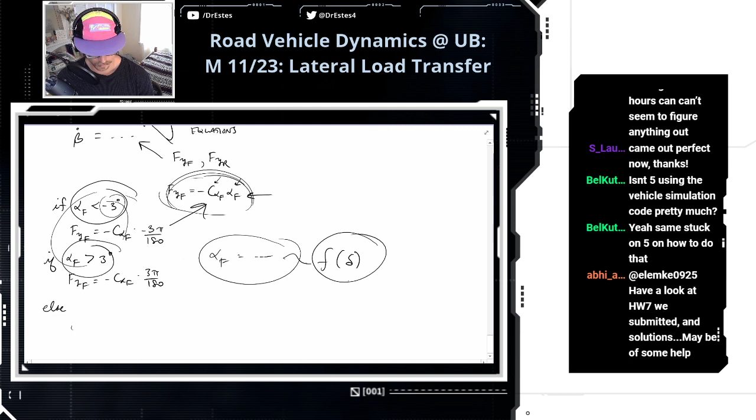It's important here that this is a function of your steer angle, because when you start to turn and introduce steering, that is going to create a slip angle, and then that slip angle is going to create a lateral force, and that's what's going to get this car turning.